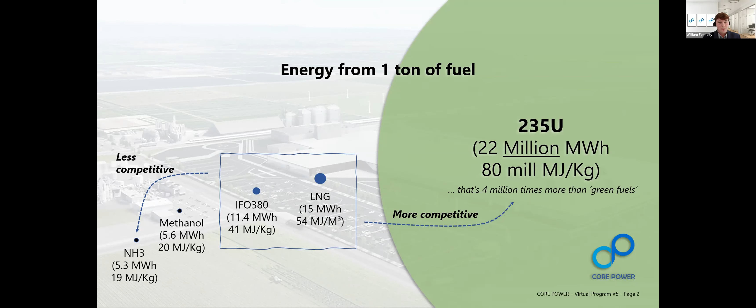Physics tells us that the quantity of fuel and the fuel efficiency determine the quantity of waste we produce. During the combustion of bunker fuel, carbon in the fuel reacts with the oxygen in the air, which creates approximately 3.2 tons of CO2 per ton of bunker fuel consumed. That's how our industry contributes 2.5% of the 50 billion tons of global CO2 emissions every year.

LNG and green methanol would improve on this, whilst in green ammonia, the pilot fuel required would be the only source of CO2. With nuclear fuel, since we use so infinitely little of it, we produce negligible quantities of waste. This waste, while toxic and harmful if ingested, is never released into the environment, unlike exhaust gases. If it's not released or ingested, it's logically not harmful.

If we are to produce a smaller quantity of waste and emissions, we must use a smaller quantity of fuel. Not less fuel by going slower, but less of a better fuel so we can go faster. Going faster on less fuel logically improves our economics.

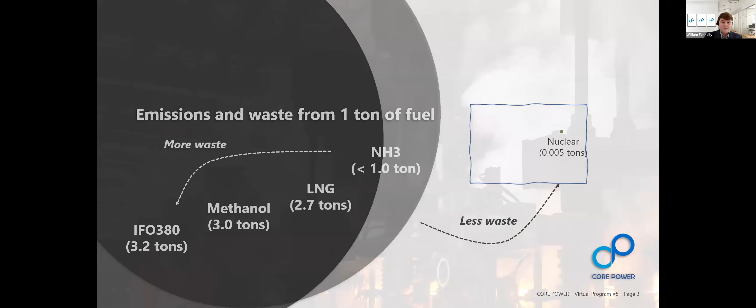Since January 1954, there have been over 700 reactors built and operated around the world. About half of these have been operated at sea, and we know it works really well. So when our industry thinks of nuclear power, it thinks of naval reactors, but we must think differently. Naval reactors are not suited for commercial use. That's why we don't have nuclear-powered ships today.

The benefits of naval reactors include millions of miles without refueling, true zero emissions, and because the reactor acts as an energy storage, we don't need fuel tanks, which gives us much more space for cargo.

But the features of naval reactors make them unsuitable for shipping. They are highly pressurized, which means we must maintain a large evacuation zone around them. This makes port calls all but impossible. Additionally, the fuel is highly enriched, which is a showstopper in civilian life. They are also tricky to operate and require a very high degree of active management by specialized crews.

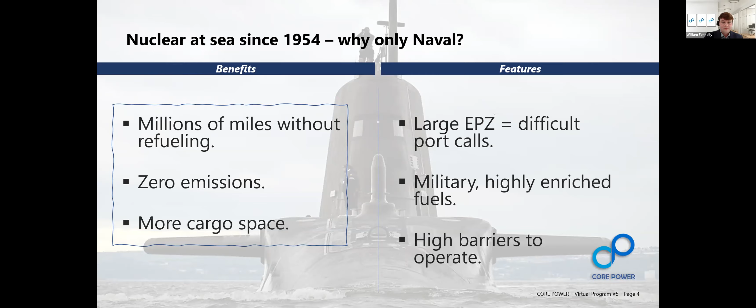What we need is a way of getting the same benefits from a new set of features that are suited to our needs. New nuclear for maritime must be fit for purpose.

Using unpressurized reactors means we can shrink the evacuation zone down to just the boundary of the ship. Operator liability would go from being a public liability to one covered by marine insurance. We can also use low-enriched fuels, which are acceptable for civilian use.

In fast molten salt reactors, we can use those fuels so efficiently that we don't need to refuel for 30 years. The extreme fuel efficiency and a small quantity of fuel combine to produce very little waste.

Importantly, we can, for the first time, manufacture these new reactors as a small mass-assembled product. Assembly line production means better construction and higher quality assurance.

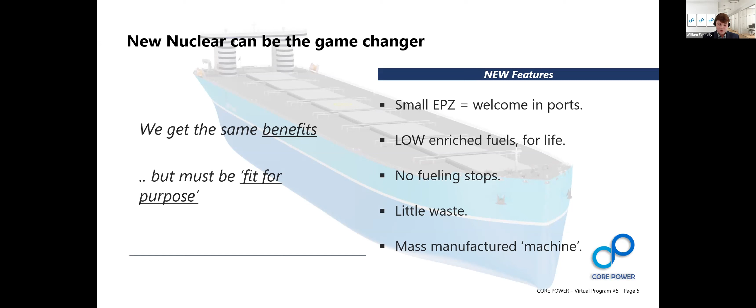The emergency planning zone, EPZ, around a reactor matters, and is one of the primary reasons why nuclear as we know it today has not been adopted by the shipping industry. It is essentially the difference between unlimited liability of maintaining a large EPZ versus the limited liability of maintaining a small EPZ contained within the boundaries of the vessel.

The examples you see here are illustrative of this point. In case of an accident with a large EPZ, the operator of the vessel would be responsible for the evacuation and cleanup of the area in the port and the whole port city. With a small contained EPZ, that liability would not extend beyond the railings of the ship and could be covered by marine insurance. It's a big difference.

In waterways, as you can see on the right, where the EPZ is moving with the vessel, a large EPZ is an almost inconceivable liability burden for even the largest vessel operators. Again, a small EPZ, not beyond the boundary of the hull, changes all of that.

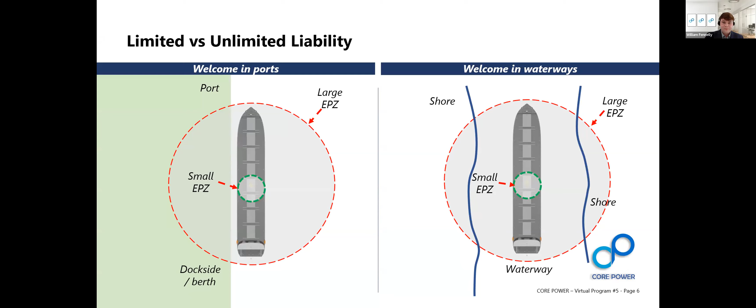Since we went from sail to steam in the 1860s, shipping alone has poured over 1 trillion tons of high-energy fossil fuels through our engines and released over 3 trillion tons of exhaust gases into the atmosphere. All that fuel had zero residual value. Not only that, it turns out pollution costs. Accounting for well-to-wake, fossil fuels have a negative residual value.

What makes the fast MSR a real disruptor, however, is the positive residual value of the fuel. And here's how: instead of stopping the reactors at refueling intervals to remove the spent fuel and load fresh fuel, the fast MSR, which runs on a liquid nuclear fuel, is topped up at full power. We don't stop, we don't produce any emissions, and the little residual waste, equivalent to that amount being topped up, we extract from the core and store securely inside the reactor island, with no harm to anyone.

This means that the tank is always full. What went into the reactor on day one is still there, intact, on the last day. At 2.5% inflation, an asset doubles in value over 30 years. With a ship or a floating production platform for synthetic bunker fuels, with a lifetime of 30 years and powered by a fast MSR, the fuel in the reactor, all else being equal, could double in value.

In the example shown, we have a $100 million asset based on a nuclear-powered Newcastle Max, a $150 million reactor, and a $250 million fuel inventory, with a total capex of $500 million. Consuming bunker fuel, the same ship with a $60 million capex, plus fuel at $600, and carbon taxes at $100 per ton, this would cost roughly the same, $500 million in combined capex and opex.

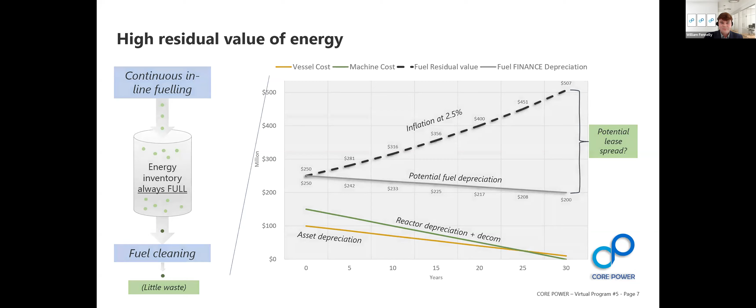So I'd like you all to start the new year by thinking differently. Fear of nuclear is always born from a lack of knowledge. It's not that complex. A little knowledge goes a very long way to understand how new nuclear for maritime and maritime for new nuclear can provide the future we all want.

To demonstrate the viability of new nuclear and maritime, we will need evidence of safety functions and systems so that we can always ensure safe and secure operations, even when a marine accident occurs.

Now, nuclear is the safest energy source we have in the world today, despite widespread popular belief. Younger generations who are concerned with climate change and global warming are learning that nuclear is the safest way to convert energy to power, and that new nuclear technologies promise true zero emissions and a sustainable environmental footprint.

With new nuclear, it's not about more safety, it's about how safety is achieved. We recognize that radiation, whether man-made or natural, is an essential part of our life on our planet. And like everything else, from red wine to hydrochloric acid, is nothing to be feared in suitable doses. Radiation is used to cure illness, not cause harm.

Radiation limits set by international organizations are set so low, they are akin to having a motorway speed limit of just 1 mile per hour, as safe as possible or as safe as reasonable.

Nuclear is the only reliable zero-emission energy source we have. The finest minds and the smartest people in the world are actively engaged in technology advancements that make this new generation of new nuclear machines fit for our purpose.

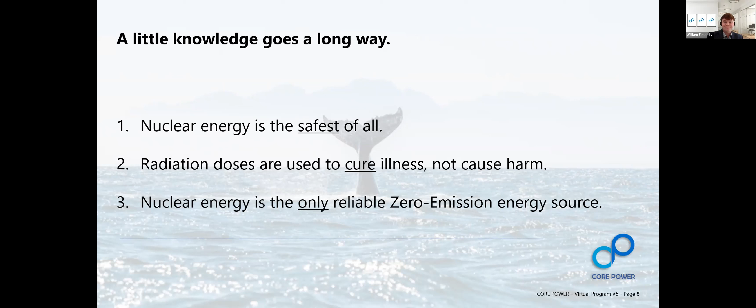Well, thanks, William, very much for that introduction. I think you've outlined really very well some of the main themes here, and I guess my main takeaways are that it's a combination of two things that will make this technology fit for purpose: firstly having an ambient pressure reactor, which in turn allows this smaller EPZ, which we've talked about, and secondly combining that with this ultra long fuel cycle, which means no refueling in ports. Now we're going to come back to the fuel cycle later on, because it's an absolutely fascinating area and it changes some of the fundamentals we know about shipping absolutely upside down.

But first, I'd now like to bring in another member of the team, and that's going to be Tom. Tom, I know you've been looking closely at the effects of mass manufacturing, and you have a number of slides to present as well. But if I can start by asking you, because this kind of naturally follows on from William's talk, we've heard about moving to assembly line production, and we've touched on it several times over the course of these virtual programs as well.

Now, of course, Core Power is just one of many companies involved in the development of advanced reactors that's looking to make this transition from project to product. I wondered, what's your take on why it hasn't been done before? Is it just as simple as it comes down to the size of the machines at the end of the day, or is there more at play than that?

Yeah, thanks, Toby. I mean, this is an interesting question. So the proposed leap, as you mentioned, from project to product has come about in direct response to the increasingly high upfront costs of nuclear.

So first, I think it's important to understand what has caused these inflated upfront costs. Now, primarily, this has been because conventional nuclear power plants have been large-scale, complex, one-off projects. And this has effectively meant that each of these projects has always assumed a first of a kind, with limited design refinement and a repeatedly changing workforce between the projects. As a result, cost and time overruns during construction have now become common, which has created uncertainty around the inflated capital requirements for this technology.

Now, this has often resulted in nuclear often being undervalued as an energy source, and this is despite its clear operational benefits, such as a high capacity factor and its much lower operational costs.

And now it's also important to note here that for the financing costs, this includes interest charges on debt, which is something that is increasingly important for the longer construction period time that is associated with nuclear. And now it is in this 80% of the costs where we see there is a clear opportunity to reduce the capex issue that has so far held back nuclear deployment.

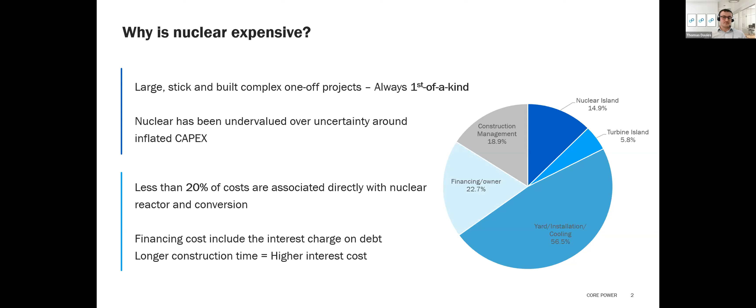Now, typical causes for this has included reduced labour productivity and delays caused by changes in both the workforce and the particular local conditions at each of these construction sites. Now, a recent study conducted on US power plants actually found that labour productivity had fallen by up to 13 times lower than the industry expectations.

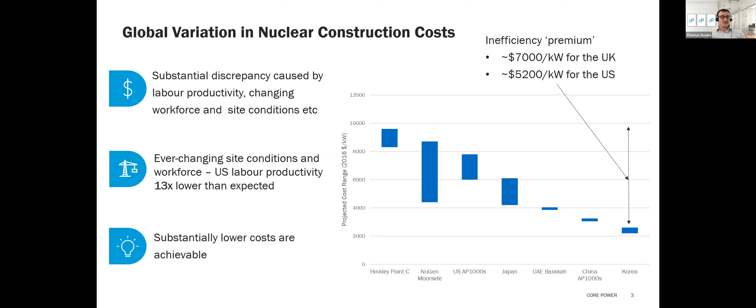However, it is also important to note that this variance also clearly indicates that substantially lower costs are achievable for nuclear.

Now, here is where we believe shipyard construction offers a game-changing opportunity. This industry, in stark contrast, has thrived on large-scale fabrication of complex assets, and it has done this by using a skilled, consistent workforce to achieve low cost, high productivity, and high-quality construction. As a result, the shipbuilding industry has been one of the first industries with verifiable learning effects, and it has seen substantial improvements in productivity in the same time that the nuclear industry has struggled.

Now, one way that shipyards have been able to achieve this is by utilising modular construction, which has allowed the transition to factory fabrication. Now, in this way, each module is manufactured in controlled factory conditions, and it eliminates the need for any site-specific work, offering an integrated manufacturing, assembly, and installation process all in one. In this way, several processes can be conducted in parallel, reducing time overlaps and increasing construction efficiencies.

It is also important to note that the shipyards can provide efficient decommissioning sites for floating nuclear assets, a process that has often caused difficulty for nuclear in the past.

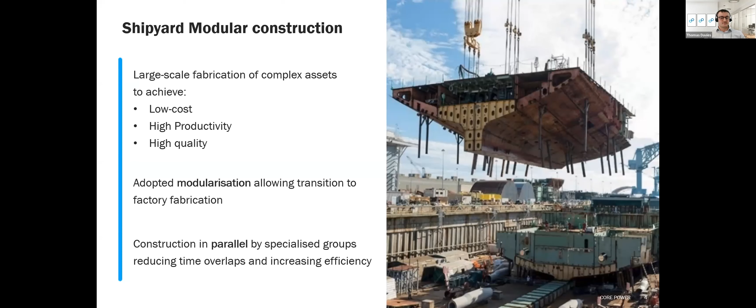As mentioned, this transition is a key strategy that nuclear hopes to adopt following the advent of small modular reactors. Core Power is working towards this transition and proposes utilising shipyard construction, which has already had demonstrated success in this area, offering a plausible route to make this transition.

The integration of this manufacturing strategy has already been proven successful in the nuclear defense industry. In order to maintain affordability, the Virginia-class program for US Navy attack submarines had to aggressively reduce its costs and schedules. In response, a small modular reactor was developed while construction was moved away from a temporary facility to a dedicated factory, closely mimicking the environment that Core Power is proposing.

As a result, the build time for the first of a kind was reduced by 29% per submarine, and the cost per hull was reduced by 17%. It's also important to note that the increased learning effects associated with modular construction will result in further unit cost reductions as there is a transition from first to nth of a kind. In fact, the latest ship produced by this project was delivered 8 months ahead of schedule and a further $90 million under budget. Clearly, there has already been proven success of this strategy for the nuclear industry.

As we look to the future of nuclear power plant construction, I want to specifically discuss 3 of the key benefits that will apply when this construction is moved to a shipyard.

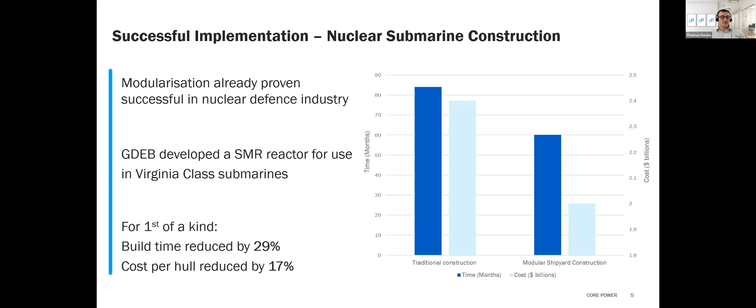The first is the speed of construction. Unlike a stick-built site, where it must first be properly outfitted before construction can start, a shipyard is already outfitted perfectly for use, offering a skilled workforce and a factory environment. In this way, productivity for nuclear construction can be brought in line with shipyard construction and avoid the extensive delays that have become common for terrestrial plants, improving both the uptime of the asset and the shipyard.

There will also be a decoupling between plant construction and site licensing, with no need for site evaluation and preparation. These processes, similar to those on the factory floor, can commence independently, further reducing deployment time. As a result, we foresee a 36-month construction period for the MSR floating power plant, which is 3 times shorter than the current industry standard, increasing the speed of commercial deployment while benefiting from an increased learning rate as the number of units increases. This increased deployment will also allow the design to be further refined and finalized after each unit, allowing the transfer to greater parallelization and further reducing construction time.

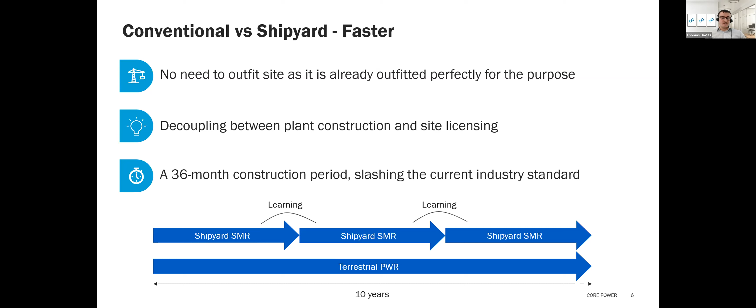Obviously, the increased speed of deployment will in turn have direct impacts on the price of the asset. Unlike terrestrial plants, modular shipyard construction will increase the speed of delivery while assuring costs. This in turn will reduce the interest and lower discount rates on capital investment, lowering the financial risks of this technology and fostering wider commercial investment and deployment.

Shipyard construction can also reduce the required materials while also reducing waste. For example, a shipyard constructed floating nuclear power plant will also be made mostly of steel with virtually no need for structural concrete, which has contributed to significant delays and cost overruns in the past. By transitioning to shipyard construction, there will be a reduction in the required concrete by up to 30 times, providing a substantial reduction in the required resources and successfully reducing costs.

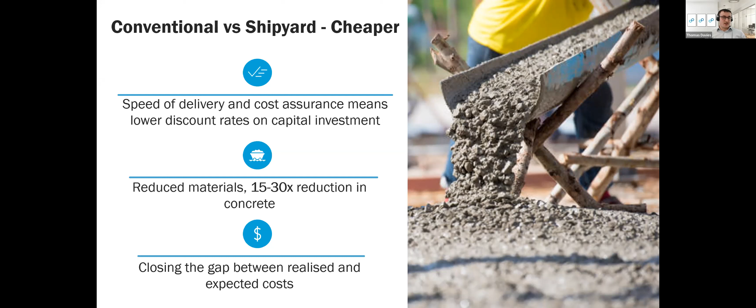In this way, a shipyard constructed floating nuclear power plant will be able to provide the economic advantages of factory production while reducing construction costs by eliminating excavation work, resource requirements, temporary facilities, and the associated labour. In turn, this will close the gap between realised and expected costs and bypass one of the greatest current barriers to wider nuclear deployment.

While sometimes not considered cost saving, safety during the construction process can also be a big cause of indirect costs. During construction, the factory environment of a shipyard can enable safety requirements to be easily monitored and designed into each module, while using a consistent and skilled workforce to repeatedly complete the same task.

As a result, accidents during construction can be reduced by up to 80% when a modular construction method is used. Simultaneously, the increased monitoring and training will also ensure that quality assurance is designed into every step, resulting in an improved quality control procedure.

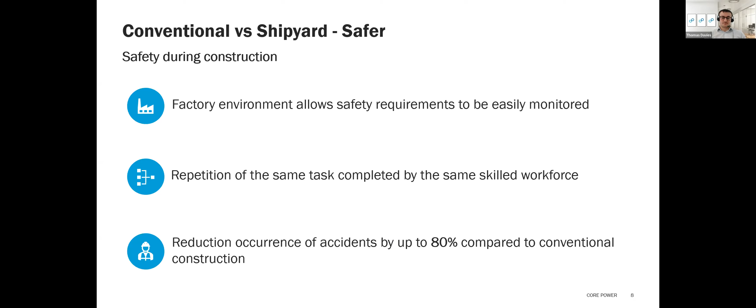So to quickly summarize, the current nuclear industry has been hampered by cost and time overruns, often resulting in massively inflated capex requirements. By contrast, the shipbuilding industry has thrived on large-scale fabrication of complex assets in a controlled factory environment while utilizing modular construction. We believe combining these two industries is a potential game changer for nuclear, offering a skilled workforce and a site already fitted for purpose, with no disruption from local conditions. It can offer a plausible route to modularization while benefiting from shipyard construction advantages such as faster deployment, cheaper manufacturing, and higher intrinsic safety, overcoming many of the most capital-intensive processes in current terrestrial deployment. We believe this can help marine nuclear achieve its economic goals through faster, more repeatable construction, bypassing one of the most significant barriers to widespread commercial deployment.

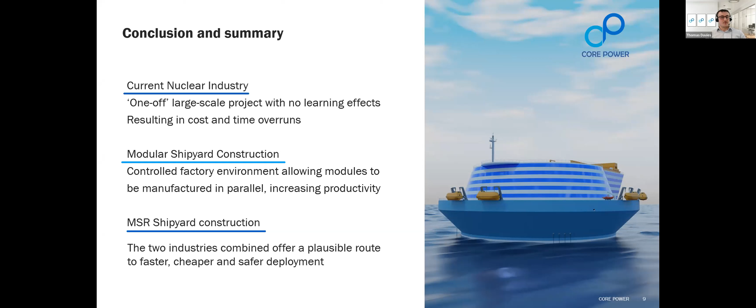And with that, I will hand back to you, Toby.

Many thanks, Tom. Some very interesting points, particularly around the non-technology costs. I was surprised to learn that could be as high as 80% for a terrestrial gigawatt scale plant. Clearly significant, and huge savings could potentially be unlocked by creating a central manufacturing hub, whether that's a nuclear shipyard or a plant co-located with a shipyard. Even if the resulting asset has to be wet towed or put on a heavy lift vessel for its mobilization voyage, that additional cost would probably pale into insignificance compared to the challenges of building on site that you outlined. So thanks very much again.

Now, our final short talk today is from Mikhail. This will look in more detail at the topic of residual value of energy. There's a fascinating and fundamental difference here, not only between new nuclear and fossil fuels, but also between new nuclear and conventional nuclear, which we need to properly explain. Mikhail's going to do just that for us today. William mentioned it in the introduction - the magic elements are in the liquid fuel salts and the inline refueling - but the floor is yours, Mikhail, so I'll let you go into more depth, because I think it's not an exaggeration to say this is perhaps the most game-changing part of the whole new nuclear offering.

I'm going to describe the way that the conventional nuclear fuel cycle works today. So when we think of nuclear, especially for maritime, we think of naval reactors. When we think of nuclear in general, we think of large power stations. And 99% of all these power stations run on this conventional fuel cycle. The conventional fuel cycle is the one that requires frequent refueling and produces nuclear waste that has become a contentious issue in the public domain. And the reason for that is quite simple.

The conventional nuclear fuel cycle has the nuclear fuel and the coolant of that nuclear fuel. The coolant is the medium that cools the reactor and also transports the heat from the reactor core out to the power conversion system that creates steam or electricity from that steam. So you have the separation of the fuel and the coolant, and that's important because it means you can take the fuel out and replace it with new fuel.

So what happens in the conventional nuclear fuel cycle is that we have fairly frequent refueling. We're using very low enriched fuels, and the frequency of refueling is related to how enriched the fuel is. In conventional nuclear power plants, you're running up to about 5% enrichment, meaning 95% of the uranium is natural uranium, and 5% is enriched so it can cause a chain reaction and create the heat we want. That means that within a couple of years, maybe slightly longer, we run out of the energy in this fuel - it starts to falter, and we have to stop the reactor for refueling.

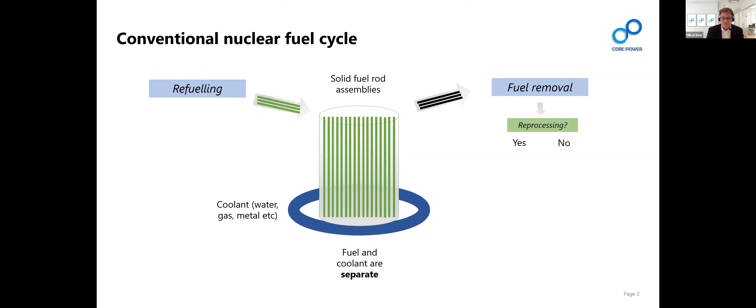If we do reprocess the fuel, then some of that fuel can go back into the fuel cycle whilst storing the resulting nuclear waste, which there is, of course, a lot less of. If we don't, then all of it goes to nuclear waste. So typically in America, in the United States, they do not reprocess the fuel, so all of the spent nuclear fuel goes into storage. In Europe, France, UK, many other places, Russia, Japan, etc., fuel is reprocessed so that some of that fuel goes back in the fuel cycle, and on it goes.

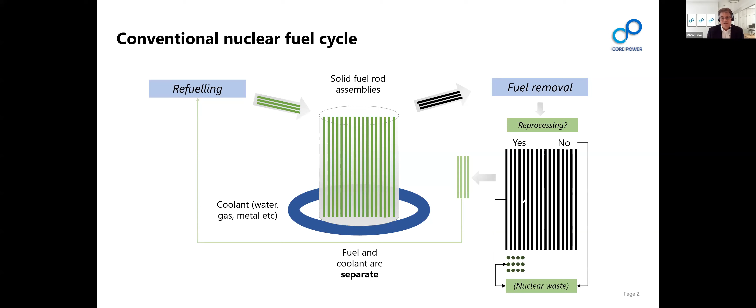So this is a fairly costly and involved process, which is one of the reasons why the operating expenses of nuclear is quite high. So if we look at the economic principles of this conventional fuel cycle, most of it is focused on operating expenses. The capex, as Tom has spoken about, is high, and there are specific reasons for that. But in addition to that, we have this operating expense.

And these are broken down generally into the following areas. So we've got this cost of specific designed fuel pellets. Each one of these reactor designs will need a specific size and configuration of the fuel pellets that go into the fuel assemblies, and there's millions of these pellets in each one of these reactors.

Then we need these solid fuel assemblies. These you may have seen pictures of - these sort of large tubes made out of zirconium that are then geometrically arranged in such a way that they can be lowered into a nuclear reactor and then function properly and be taken back out again.

And then, of course, when we stop for refueling, we've got the power outage. It can take anything between a month and 3 months to refuel a conventional reactor. Some do it faster, but sometimes it takes even longer. So of course you've got the power outage during that time - you're not producing revenue from power production.

Then we've got the cost of the fresh fuel supply chain. Now, uranium is still quite cheap, but you've got the enrichment process, you've got the transport, and you've got that process of refueling. And then, of course, now we've got to take the unused fuel out. It's not nuclear waste, so to speak - it's just unused fuel, the energy that we haven't used yet, and we have to then take it out.

And we have to store it either intermittently, because it's going into reprocessing, or for the longer term because we're not going to reprocess it. And then, of course, you've got that cost of long-term storage, security around that's required, and then at the end of the life of this thing we need to decommission, and that's of course something that's expensive. If we reprocess the fuel, we've then got to add the cost of nuclear fuel transport, which is from the reactor site to the reprocessing site.

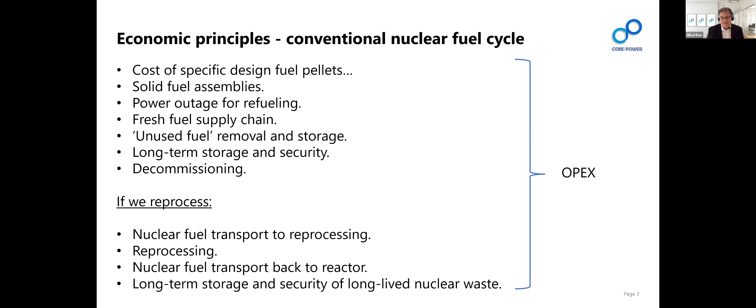The waste that's left over, that little bit of footprint that's left over once the reprocessing process is over, the long-term storage and security of that, which is fairly long-lived nuclear waste, also has to be accounted for. So it's really operating expenses added to the capital expenditure of building nuclear plants that have to be considered very carefully.

If we then look at the new nuclear fuel cycle that we're describing here, that William was alluding to with the fast molten salt reactor, the basic principle is that we are trying to achieve what is being done in naval reactors, where they operate an extremely highly enriched fuel, which does not need to come out of the reactor.

You do not need to refuel it, but it's something we cannot do. So we need to operate with low enriched fuel, and we must maintain that benefit of having a long fuel cycle for the reactor, which means we need to create a situation where the energy inventory of the reactor is always full. The nice thing about this molten salt reactor concept is that we combine the fuel and the coolant.

So we don't have a separate fuel from the coolant. In a sense, we cannot remove the fuel from the fuel salt. It is already combined in it. So we have a much simpler way of operating, which is quite good.

The way that we intend to maintain a full inventory of energy at all times is to do continuous inline refueling. You can think of it conceptually like a hamster drip, dripping fuel into the reactor on a frequent basis. Of course, it's not going to function exactly like that, but that's the concept. So you're topping up that little bit of fuel that you're using.

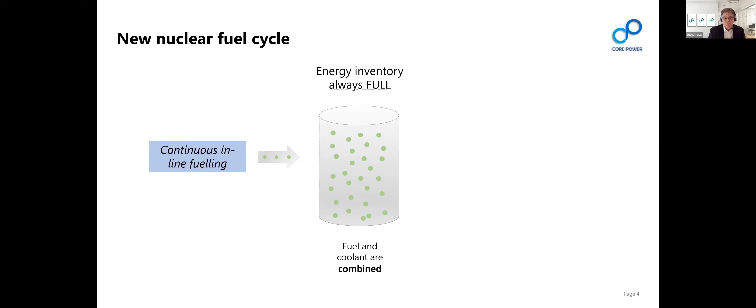Remember the fuel efficiency here, as Will again said, you've got 80 million megajoules per kilo of fuel here, and you have very, very slow usage of that. So we're topping up with very small amounts of fuel.

And then at the back end of the reactor, we have a cleaning system so that the fuel, as it passes through around the reactor, is then cleaned. So we have a fuel cleaning system that takes out noble gases, takes out some of the impurities, some of the fission products, etc., and then stores them securely in the reactor island, so that they're not extracted, not released into the environment, not available for anybody to move around. They just stay with the machine.

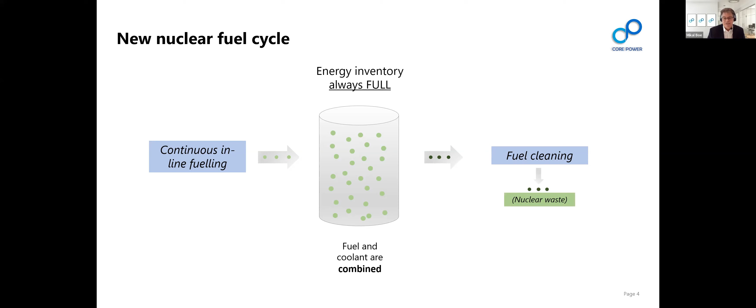Now, by doing this, we can continuously maintain that full energy inventory in the reactor and emulate the benefits of having a very long fuel cycle. Of course, that fuel cleaning becomes nuclear waste, but again, it's just the energy that's being used, not the 99% of the fuel that is consistently not being used. And since it's small, we can store it efficiently and not release it into the environment.

The economic principles of this new nuclear fuel cycle combine the capital expenditure and the operating expenditure. So really the main cost elements we're looking at here, which of course is not related to building the reactor and the reactor system itself, but to the fuel cycle, is the cost of correctly enriched uranium oxide. So we're no longer talking about having pellets, configured, specific, designed pellets that go in. This is made just purely as an oxide, a powder form which is correctly enriched for that particular reactor system.

Then we have the cost of the inline refueling system, which is not trivial because you can't just pour fuel in by eyesight. You have to do this scientifically to make sure the correct amount of energy is in the reactor. And then, of course, we need to monitor what that fuel inventory is. So there's a cycle of monitoring, topping up, monitoring, topping up, etc. That fuel inventory monitoring system, in a very hot environment, needs to be robust and fairly simple to operate, but should be reliable as well.

Then at the back end, of course, we need that fuel cleaning system, and again, this is not a trivial thing. These are complex chemical compounds, etc. Some of them are statistically unknown, and they must be either kept in the reactor, or if they're coming out through the fuel cleaning system, need to be dealt with. So it should be a fairly simple system that identifies what needs to be brought out, and the fuel cleaning system then takes that and cleans the fuel of those impurities, so that we don't build up impurities in the fuel and cause degradation of the machinery, or even shorten the fuel cycle.

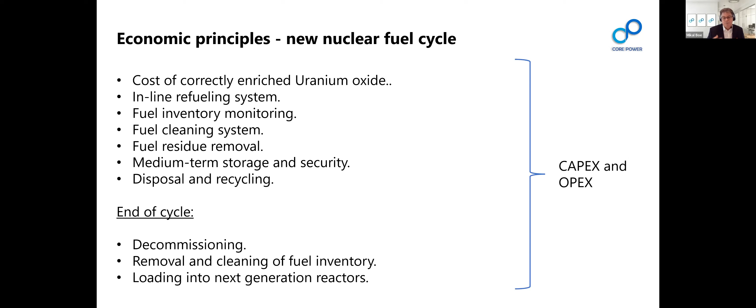That's a cost that comes, just like with any other machine that needs to be scrapped or decommissioned. And then of course we need removal and cleaning of that fuel inventory before we can load it into the next generation of reactors. The idea is that since the energy is always intact and the fuel should be clean enough to continue being used in other reactors, we can keep loading it into next generation reactors again and again and again, rather than continuously replacing all the fuel.

So the way that we think about this is really to try to create sustainability, not just in the inventory, but sustainability in the energy supply to marine assets. And of course, if we can use this on land or for other purposes in the same way.

So essentially you're reducing the amount of mining being done for fresh fuels, you're reducing the enrichment, you're taking away the need for reprocessing, and you're producing a much smaller quantity of nuclear waste, which is much shorter lived and can be stored underground or in specific locations without too much difficulty. So again, a sustainable nuclear fuel inventory is really what we're looking for here.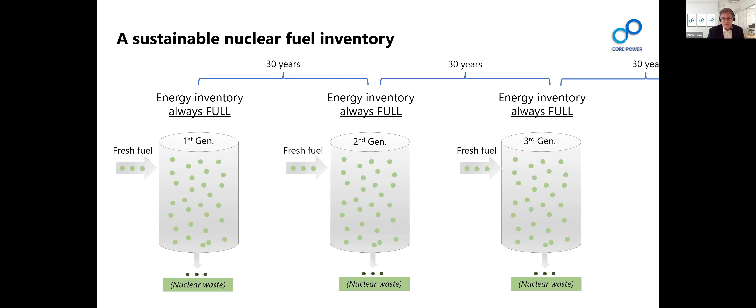The capex up front then becomes a big number, but with the higher residual value, it changes. So if we're looking at the machinery, we're looking at the reactors and the asset—in this case, of course, we're looking at a vessel, but it's just for example. These are principles, not exact examples.

The reactor depreciation—we're adding to that the cost of decommissioning. This decommissioning fund is basically a number of dollars per megawatt hour produced, which is then added to that depreciation and added to the cost of operating this.

But what we've done very conservatively here, Toby, is we've said, okay, this is going to zero. We're not going to have any scrap value in the metal or in the machinery, etc. Of course, there is that possibility that we could reuse this if they have longer periods of time. So that's the machinery side.

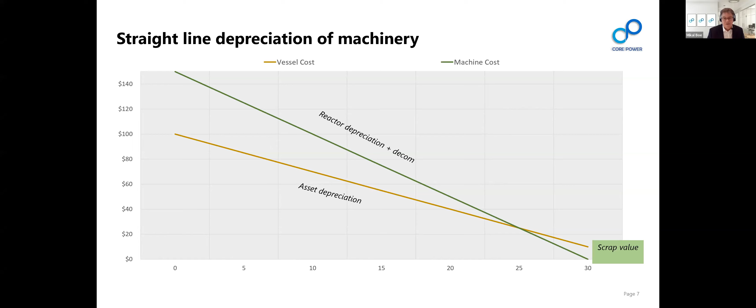Now, if we're looking at the effect of inflation, as Will again pointed out, at 2.5% inflation will cause the doubling of value of an asset, all else being equal. A well-maintained asset over 30 years at 2.5% inflation will double in value. Of course, now we've got inflation at 10% in the UK—we have slightly less in other places, slightly more in others again.

But a long-term inflation of 2.5%, I think, is sensible. So we're looking at the potential increase in the value of that fuel inventory as it goes along. Now, naturally, OPEX would increase by inflation, as would the price of everything else. So this is a principle that sits at the heart of the way that we would think about financing this.

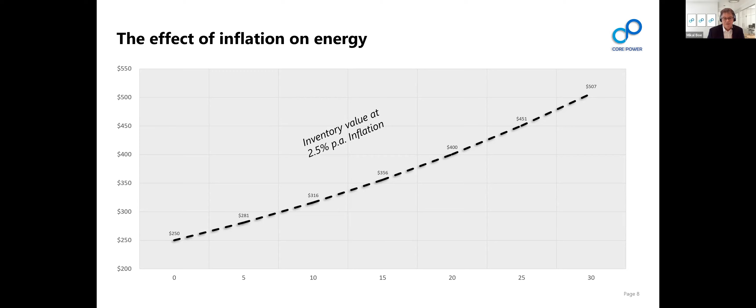Now, if we then look at the effect of all of this—and this is the same chart that Will showed earlier—it's really about how we could create a leasing model around this. I'll talk a little bit afterwards about why we would create the leasing model. But a leasing model is an interesting one because we've got this potential lease spread, the potential for a financing, from a finance perspective, to depreciate the fuel.

Here we've gone from $250 million to $200 million. We're depreciating the value of the energy by $50 million over 30 years. And if you add that to the $10 million scrap value of the vessel, you've got $60 million in depreciated value.

So you're going from 500 million capex to 60 million in residual value of the entire asset, if you like. Now, that's a fairly burdensome financing task for those who would operate these vessels, and would probably make them quite expensive.

But if the actual value of the fuel comes up from 250 up to $500 million or anywhere near that, we can change that residual value. We can move that $250 million up to flat, so it's still 250, move it up to 300, 350, all the way up to 500.

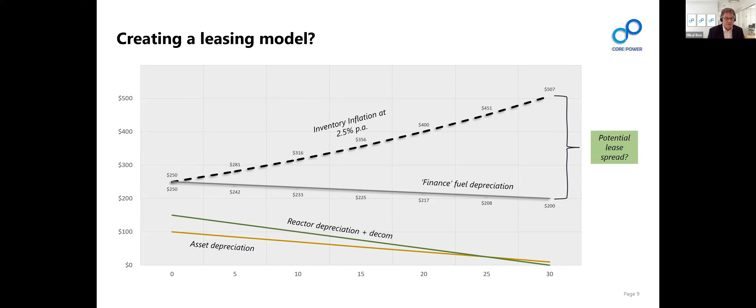But in between there sits that potential for a lease margin where we can have the cost of capital, the cost of operating the systems, and the profit margin for the manufacturers and operators built into that. What is effectively, in this example, a $300 million lease spread over time. So you're looking at something which is 60% of the total capex, which still sits there in additional residual value.

So we think there's real potential here for creating a very interesting leasing model. Now, why would we create a leasing model on this? A couple of things that we have to remember. We need, at all times, to follow the rules - these are the laws as they are.

Ownership and inventory control of nuclear fuel is tightly regulated. We cannot have anybody going out and buying and operating nuclear fuel - you have to be licensed to do so. They're also export control related. You cannot just buy enriched fuels from anywhere and move it around. There's a very close export control list, so they have to be done in jurisdictions within certain flag states and in certain areas. You can't just freely move them around, not yet anyway.

The second thing is there is no second-hand market for nuclear fuel. Once you've got spent nuclear fuel, or nuclear fuel that can be used again, you can't just put it on the market and see if somebody else wants it. So it has to stay in the cycle, if you like.

And then the responsibilities of operating this machine sits with the design holder - the designer, manufacturer, vendor of the machines, and of the operation of that reactor, whatever type it is. The responsibility for the fuel sits with the duty and license holder, which is the licensed operator of the reactor. Then at the end of it, the nuclear waste and decommissioning needs to be managed, and that again ties back to the duty and license holder - it's the responsibility of that person.

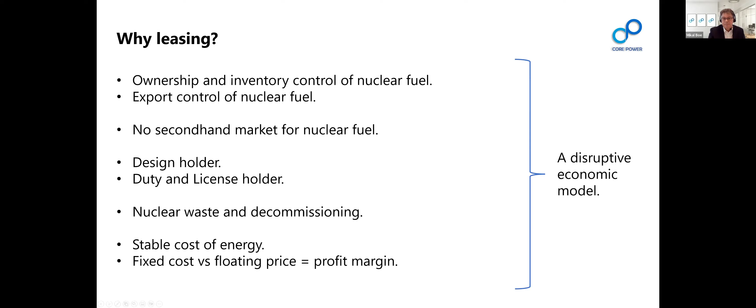Great, thank you very much, Mikael, for that. It's always interesting for me to learn a bit more about this topic of the fuel salt life cycle, and you obviously also managed to tie that in today with how that lease spread might look on the fuel inventory - 60% of the original capex really is quite a significant number, isn't it?

So now we've heard from all of our panelists today individually. I'd like to open up the discussion to include all of them together. We've examined the economic benefits from a few different angles, and we've looked a bit at this concept of shipyard construction. I wondered, would the panel be able to expand on that a little, as it seems as though the main benefits will be derived really from the perspective of a floating nuclear power plant rather than another asset. Is that really the case?

Julia, do you want to answer that? Julia, you're muted.

There is a lot of efficiency that can be derived from shipyard manufacturing, as Thomas has very well demonstrated in his slides and arguments. Another very important efficiency is related to decommissioning, which hasn't been discussed here but is extremely relevant. Nowadays, nuclear plants are decommissioned at site: the site initially becomes a construction facility, and at the end of the life of the plant, it becomes a decommissioning facility, with the cost of outfitting every single site each time. With a floating power plant that can be decommissioned in a centralized facility, these costs are borne once for all, and the site can be well outfitted to do things efficiently, quickly, and safely.